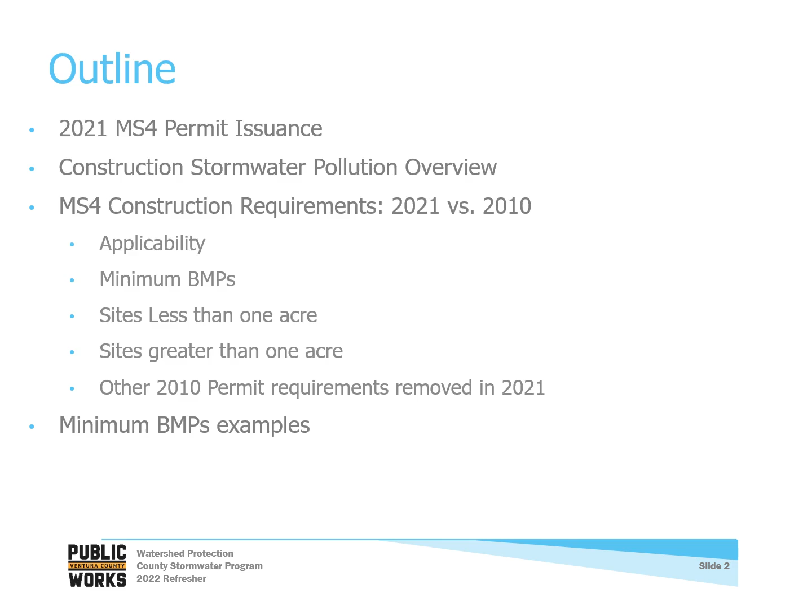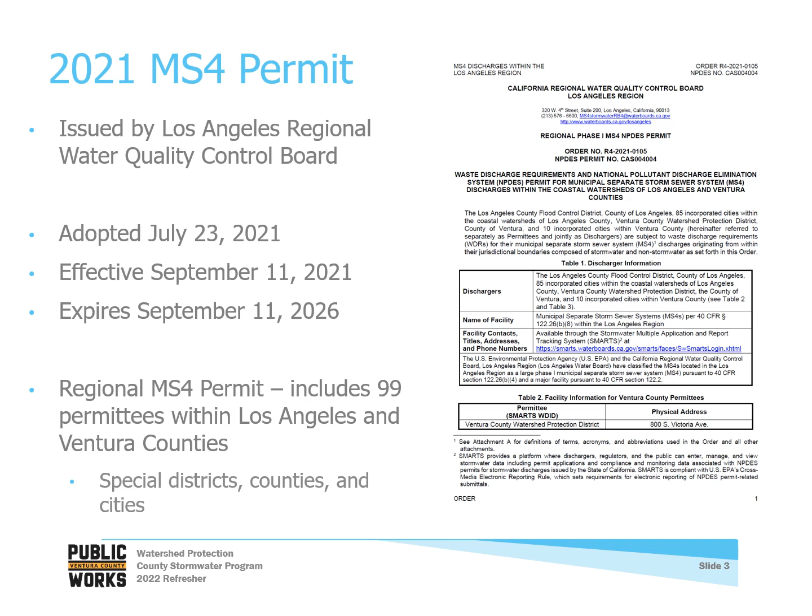In July 2021, the Los Angeles Regional Water Quality Control Board adopted a new regional MS4 permit that applies to all 99 permittees within the Los Angeles and Ventura counties. In the past, Ventura County has been issued a separate MS4 permit, so this is the first regional permit for Los Angeles and Ventura counties. The 2021 MS4 permit became effective on September 11th, 2021.

The 2021 MS4 permit provides two compliance pathway options. The traditional option to implement minimum control measures and comply with effluent limits is similar to the compliance strategy of past Ventura County MS4 permits. The Watershed Management Program option is a strategy that allows permittees to address water quality on a watershed scale.

All permittees from Ventura County, including the County of Ventura, have opted to pursue the Watershed Management Program option and have submitted notices of intent to the Regional Board that they intend to develop watershed management programs. Next, Ventura County permittees must develop watershed management programs and submit them to the Regional Board for approval by September 11th, 2023. This timeline is important because while watershed management programs are developed, permittees will continue to implement minimum control measures from the 2010 MS4 permit.

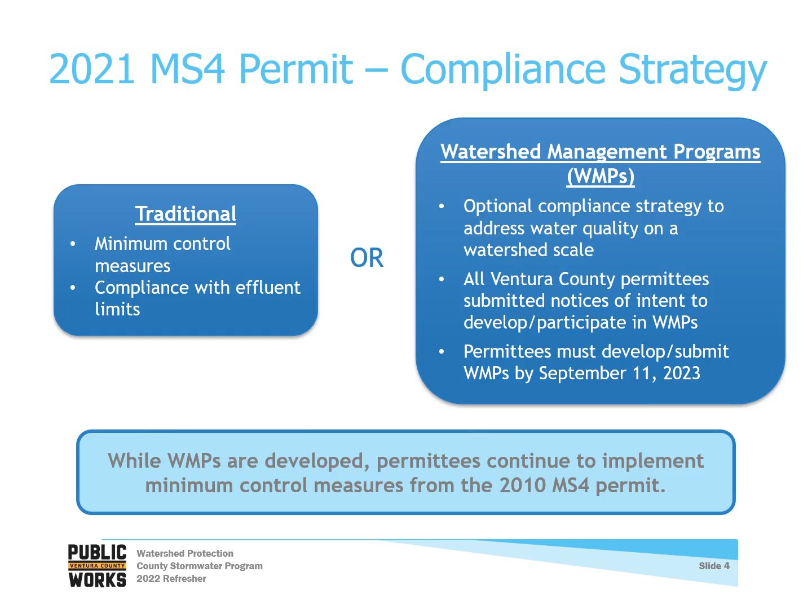Because Ventura County permittees need time to develop watershed management programs, the 2021 MS4 permit allows us to continue implementing the minimum control measures of our 2010 MS4 permit while the plans are developed. Minimum control measures include permit requirements for our programs like construction, planning and land development, illicit discharges, and others. This timeline means that the construction program changes that we will cover later in this training will not become effective until the watershed management programs have been approved by the LA Regional Board.

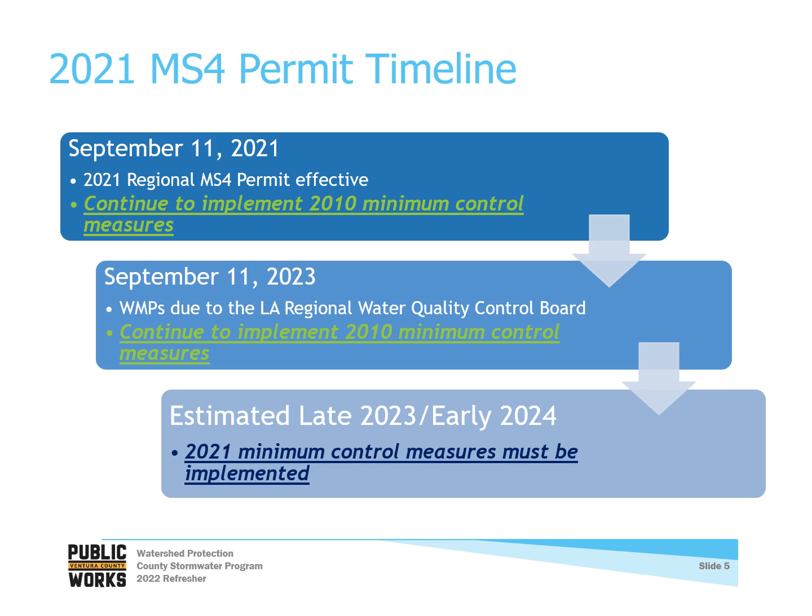Similarly, other minimum control measure changes like those for public agency and planning and land development requirements will not become effective until the watershed management programs have been approved. Regional Board approval is expected sometime in late 2023 or early 2024. That was a brief summary of the 2021 MS4 permit.

Before I go over the details of the construction program, I will provide a refresher on why construction is regulated for stormwater. Construction activities are considered high risk for stormwater pollution because there are pollutant sources that are unique to construction, particularly exposed soil. Unprotected, loosened soil can erode up to 100 times faster than natural surfaces that are compacted and or vegetated. Stormwater runoff can then convey sediment and other pollutants to surface waters.

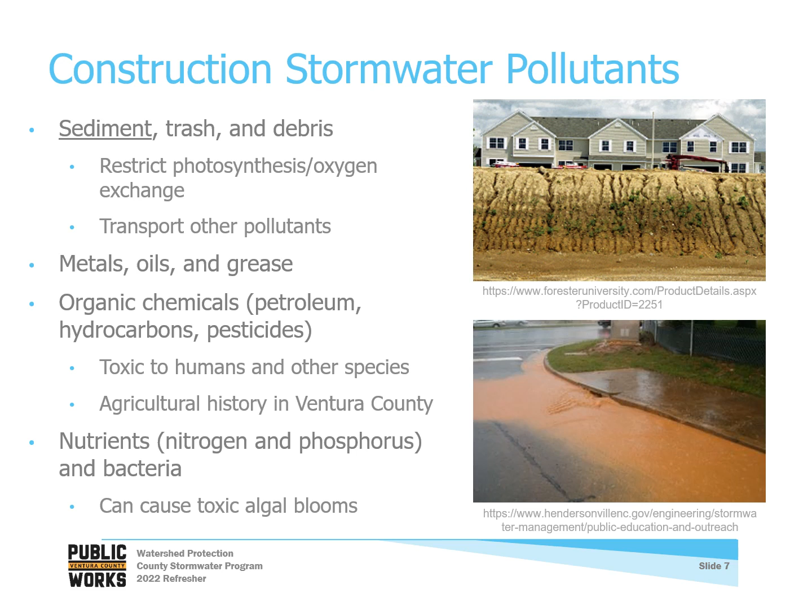To go over some of the impacts of construction pollution, the first that typically comes to mind is environmental pollution. For example, trash is a very common pollutant from construction sites, which, once in our surface waters, can be consumed by birds and fish and may lead to their death.

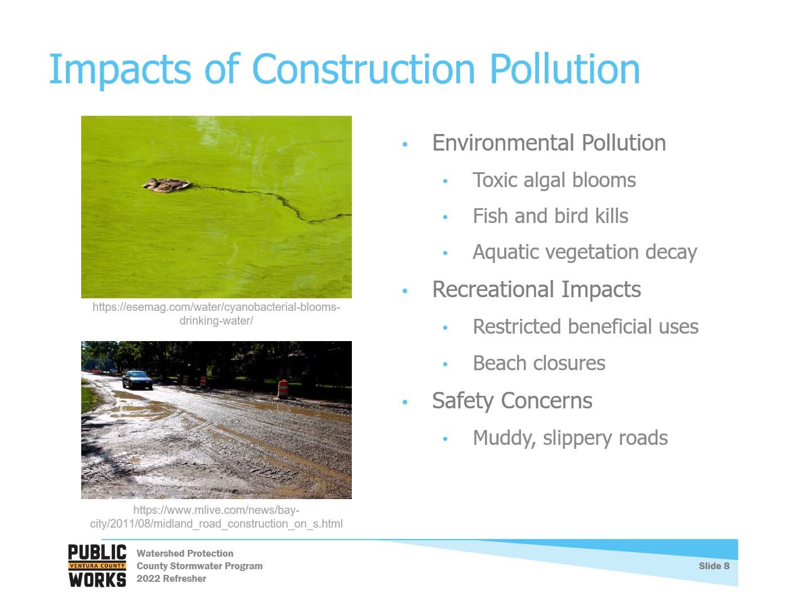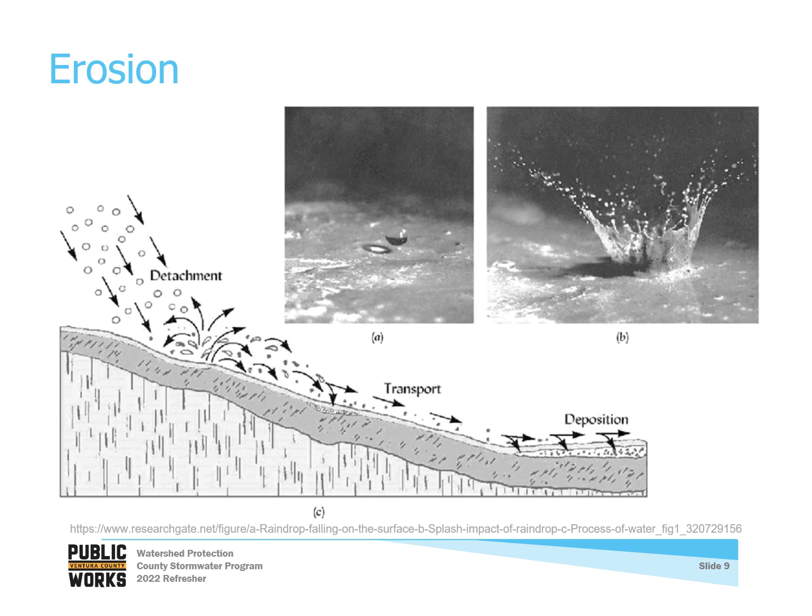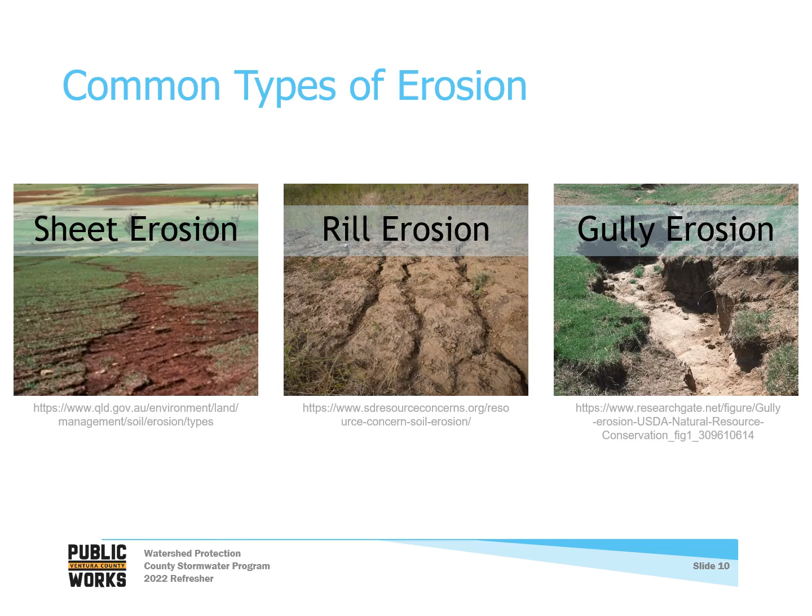Next, we'll take a look at a comparison of the new and existing MS4 permit requirements for construction. Note that the information on the next set of slides is color-coded to clarify which requirements are from the 2010 permit and which are from the 2021 permit. New 2021 permit requirements are in blue, and existing 2010 permit requirements are in green. As a reminder, the updated requirements of the 2021 MS4 permit discussed in this section are not expected to become effective until late 2023 or early 2024.

The first section in the construction program is on applicability. The language shown here is new to the permit and it clarifies applicability that wasn't clearly defined in the 2010 permit. This is added clarification and it does not replace language from the 2010 permit. Generally, any activity that disturbs land is subject to the construction program requirements.

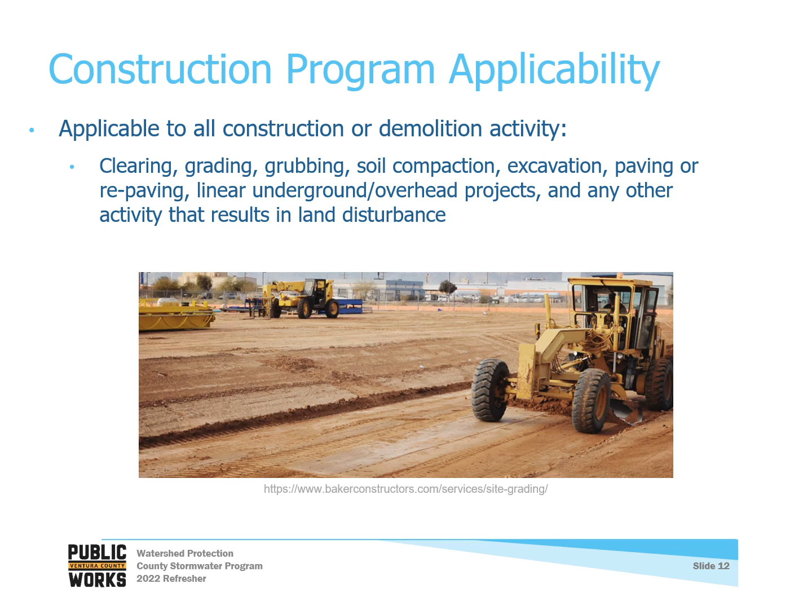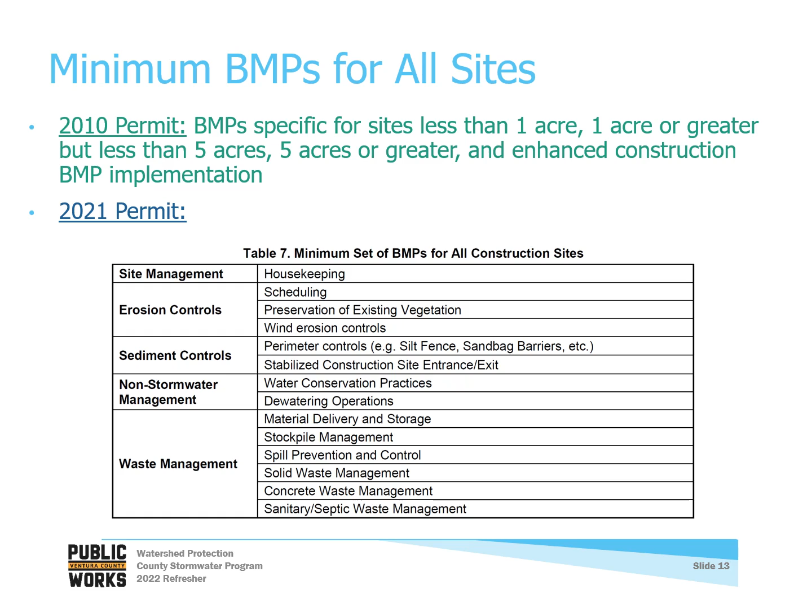The minimum BMPs, or best management practices, for all sites is a notable change from the 2010 permit. In the 2010 permit, we had multiple tables of minimum BMPs based on site size or risk level. In the 2021 permit, the minimum BMPs have been greatly simplified into one table applicable to all construction sites. Table 7 in the permit lists the minimum BMPs, which are similar to the 2010 permit's minimum BMPs for sites less than 1 acre. Note that these are minimum BMPs, and many sites will need additional BMPs to effectively control erosion and sediment. We will go over some examples of these minimum BMPs in the last portion of the training.

Table 8 from the 2021 permit includes the minimum BMPs for roadway paving projects. These BMPs are unchanged from the 2010 permit.

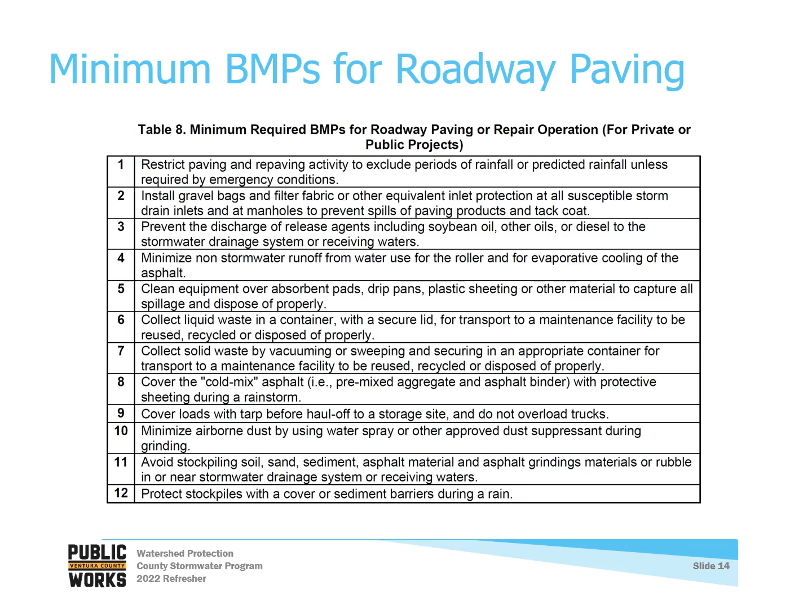For construction sites less than 1 acre, the 2021 permit requires an effective combination of the minimum BMPs. There was a change in the inspection frequency for sites less than 1 acre. The 2010 permit required all sites, regardless of size, to be inspected a minimum of once during the wet season. The 2021 permit requires inspections as needed, based on factors that threaten water quality. This could mean increased or decreased inspection frequency, depending on the project characteristics.

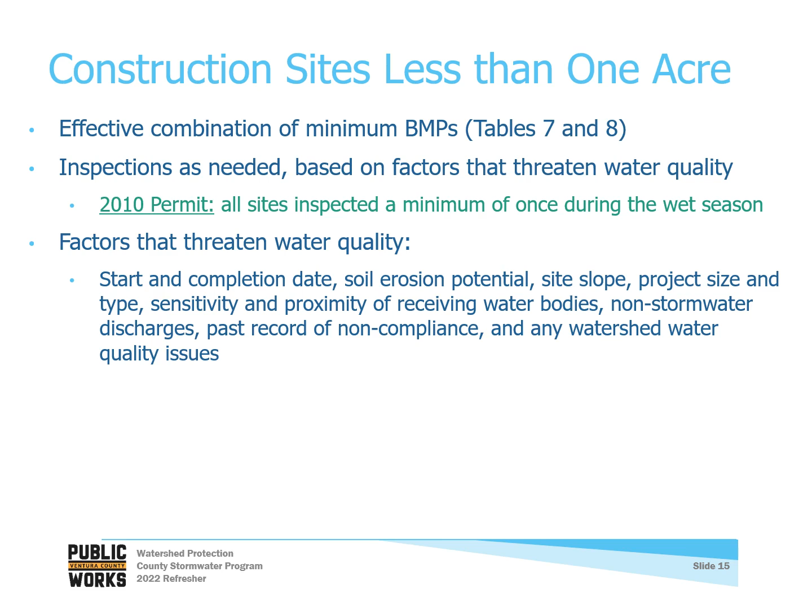Listed here are the factors that the permit identifies as threatening to water quality. Some examples include site slopes, proximity to receiving water bodies, and watershed water quality issues. These characteristics are fairly broad and could apply to many sites. This change gives the county flexibility to assess risk on a site-by-site basis, identify inspection frequency needs for all small projects, and document for permit compliance.

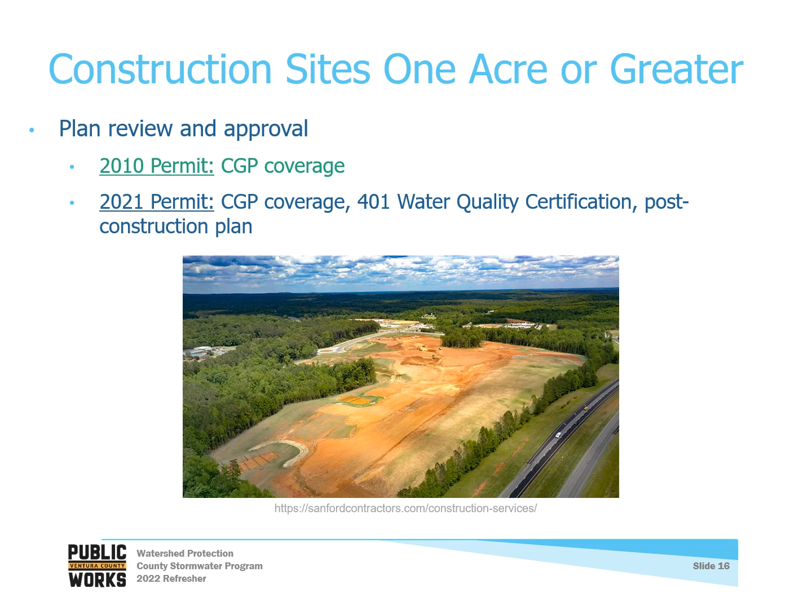There were multiple changes in the 2021 permit for sites 1 acre and greater. For plan review and approval, the 2021 permit increased the requirements to add 401 water quality certification and post-construction plans to the list of items that agencies need to verify prior to issuance of grading, building, or any other applicable permits. This means that the county may need to ask for additional documentation when reviewing projects for permit approval.

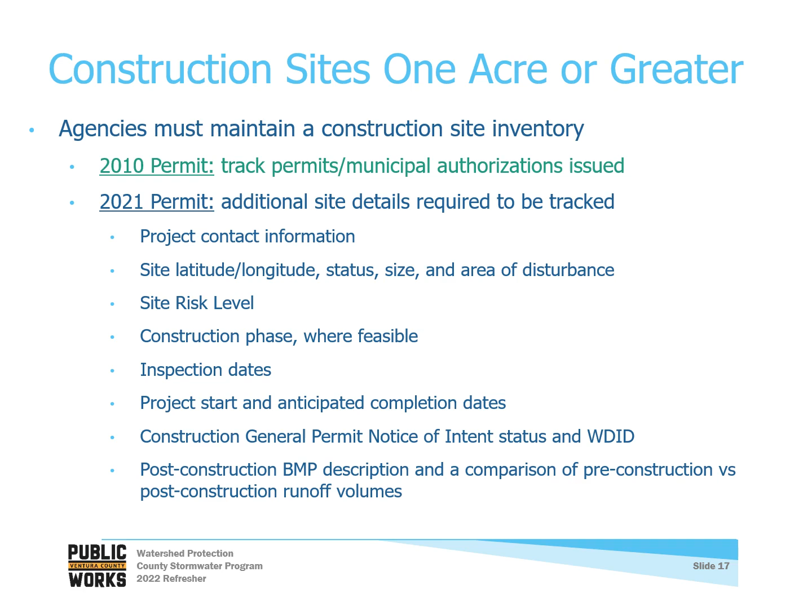For the construction site inventory requirement, the 2010 permit required that the county track permits and municipal authorizations issued. However, the 2021 permit expands the requirement to specify additional site details that need to be tracked. A few examples include site risk level, construction phase, and WDID.

The site inspection requirement for large sites 1 acre or greater is generally the most significant change in the 2021 permit's construction program. As mentioned before, the 2010 permit required all sites to be inspected a minimum of once during the wet season. The 2021 permit requires monthly inspections for all large sites and inspections every 2 weeks for large sites that are a significant threat to water quality.

The regional board did add language to this section suggesting that the inspection requirement could be met by the project's QSD, QSP, or CPESC on behalf of the county. However, that language includes the requirement for the county to verify and take responsibility for the inspection findings. As of now, we are unclear if this could reduce inspection effort for the county because the county would need to do an inspection in order to verify inspection findings. This may be a topic that is discussed further as the watershed management programs are developed.

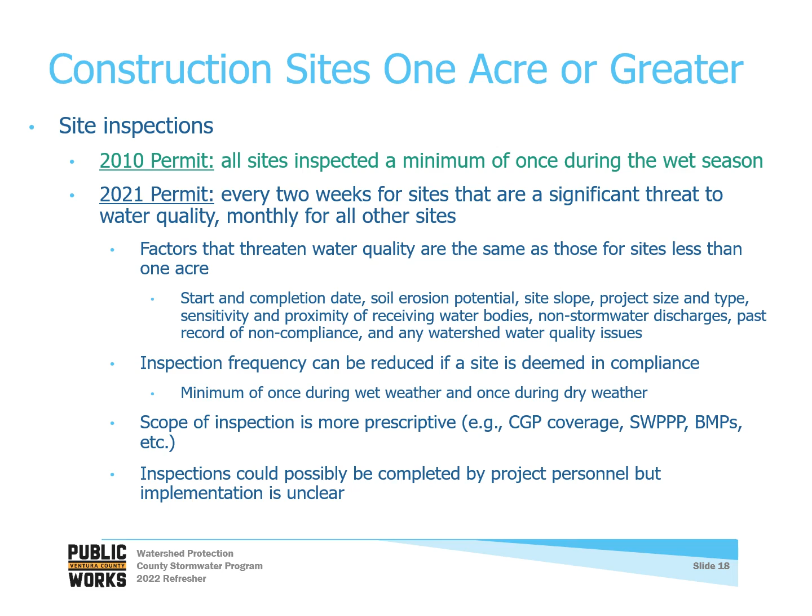Lastly, there are a few elements of the 2010 permit that were removed in the 2021 permit. As mentioned earlier, all of the tables with different minimum BMPs based on site size or risk were replaced with one table for all sites. The local SWPPP requirement from the 2010 permit was also removed. This included the requirements for rationale of the BMPs selected and the certification statements for the engineer and landowner.

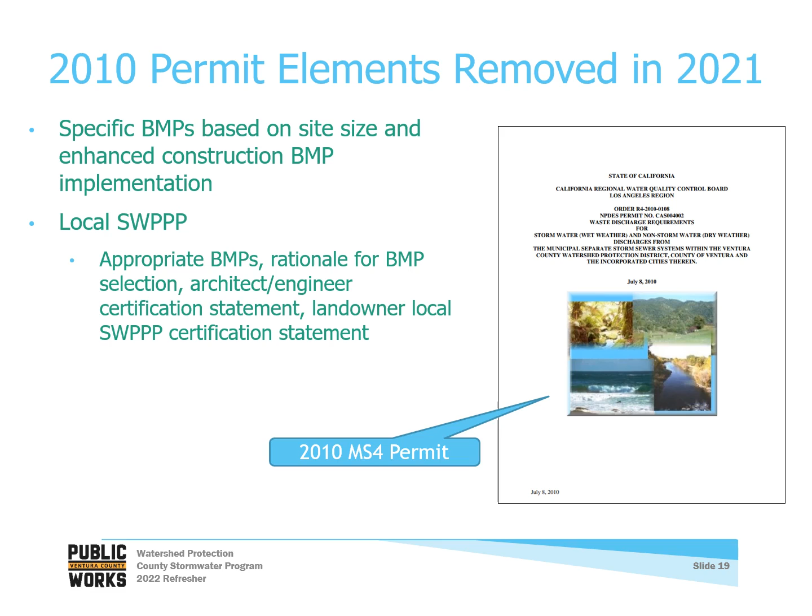To finish, we will review some examples of the 2021 permit's minimum construction BMPs. The 2021 MS4 permit splits minimum construction BMPs into 5 categories.

Site management BMPs are an overall approach to limit pollutant contact with stormwater. Erosion control BMPs aim to prevent or reduce erosion from happening, and should be the focus of stormwater designs because it is harder to control sediment once it has been eroded. However, sediment control BMPs are always necessary in case erosion controls fail, trapping soil particles after they've been eroded. Non-stormwater management BMPs aim to prevent discharge of materials other than stormwater, and waste management BMPs aim to prevent the discharge of trash and other waste.

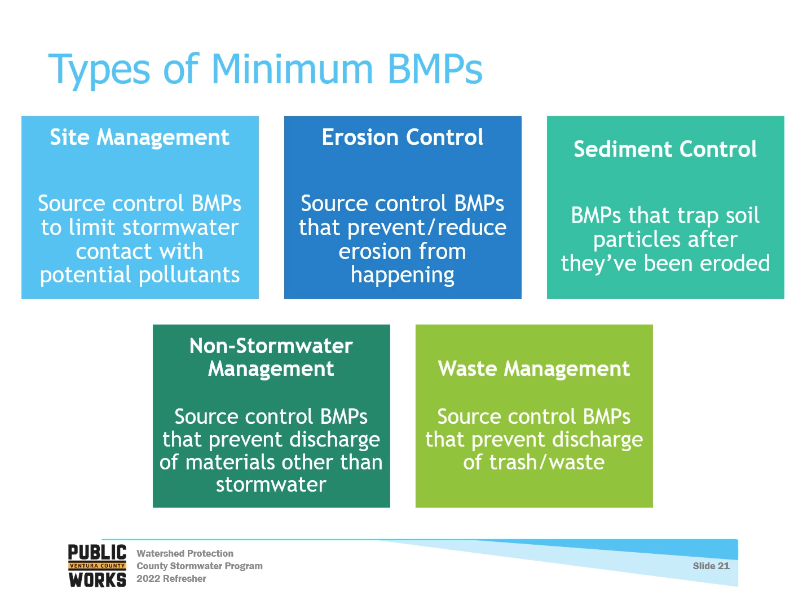Site management is a new BMP category in the 2021 permit, and it includes housekeeping. This category essentially combines efforts of all other types of source controls. The goal of housekeeping is to keep the site tidy and well managed, and it is closely related to non-stormwater and waste management BMPs.

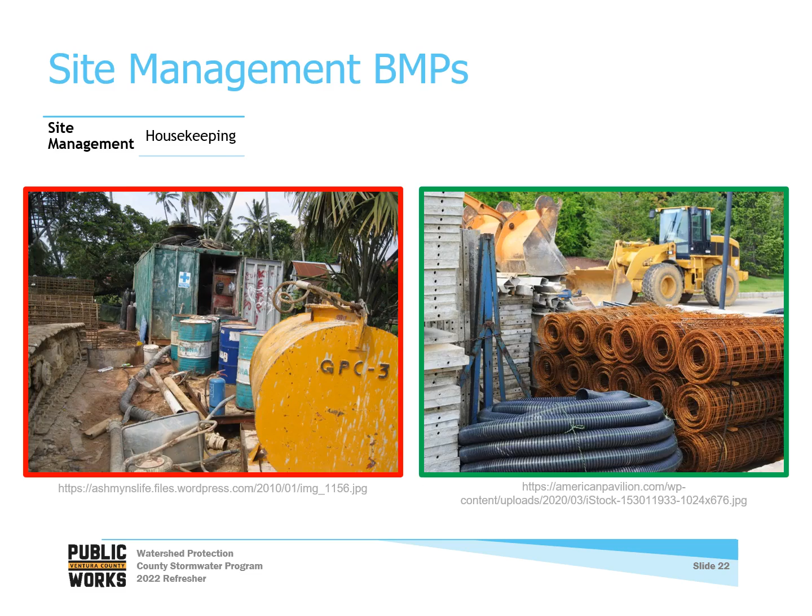Erosion control BMPs include scheduling, preservation of existing vegetation, and wind erosion controls. Scheduling is the implementation of a written plan to sequence construction activities and implementation of BMPs with consideration of local rainfall patterns. The goal of this is to minimize exposed soil when rainfall is likely to occur and to implement appropriate BMPs for each phase of construction.

Preservation of existing vegetation focuses on minimizing clearing so that established vegetation can continue to provide cover and root stabilization for site soils. Wind erosion control is a new BMP in the 2021 MS4 permit. An example of wind erosion control is using watering for dust control. Note that these are minimum BMPs and many sites will require more robust erosion controls.

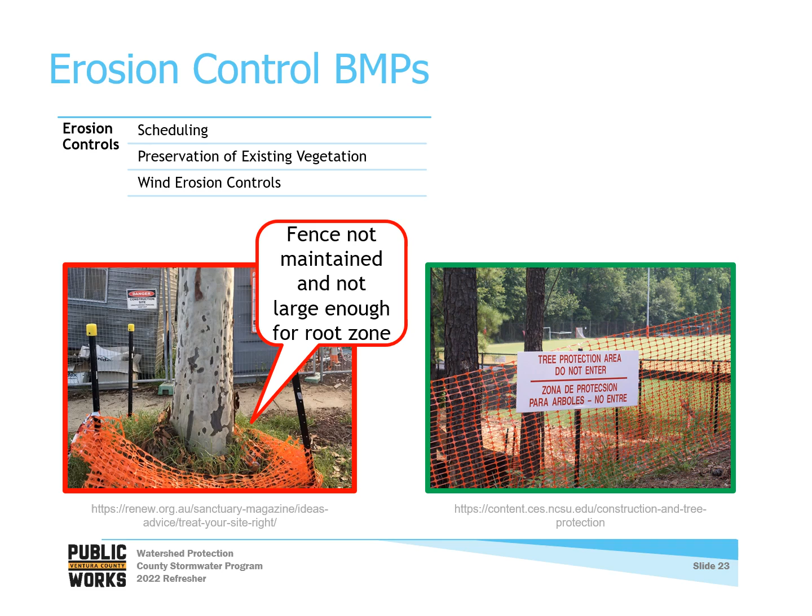Sediment control BMPs include perimeter controls and a stabilized construction site entrance. Perimeter controls like silt fence or sandbag barriers filter runoff as it discharges off-site. It is important that perimeter controls are properly installed and maintained. However, it is also important that BMPs are selected based on site conditions. Some perimeter controls aren't always appropriate for a given site. For example, sandbags are too labor-intensive to maintain along perimeter, or silt fence can't be installed on hard surfaces.

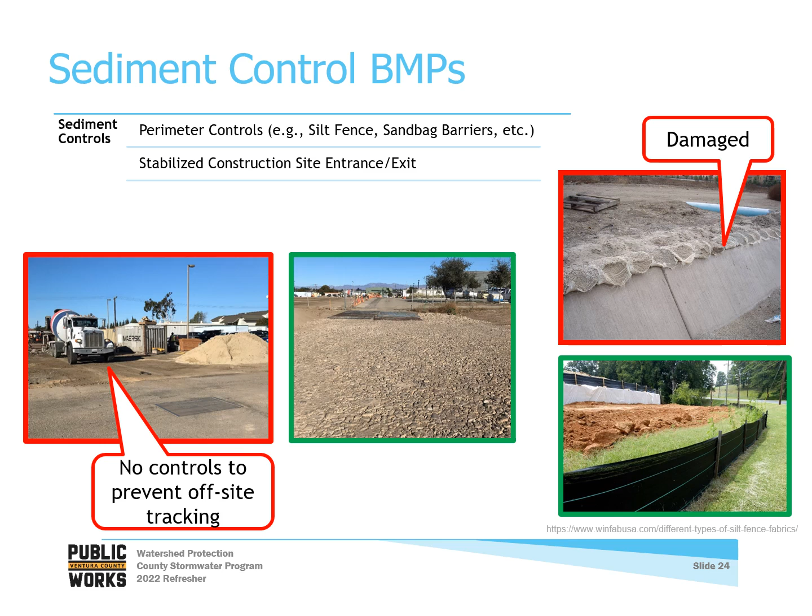A stabilized construction site entrance is a defined point of access for the construction site that has been stabilized to reduce tracking of sediment onto off-site roads. All entry to and exit from the construction site should be limited to the stabilized construction entrance for all vehicles, including passenger vehicles. Other unstabilized entries should be blocked to prevent use. Rock for the stabilized construction entrance will need to be replaced or turned when sediment has clogged the void space. Trackout is one of the easiest ways for a site to have an off-site discharge, and it is considered a violation of stormwater requirements. Therefore, it is important that the stabilized entrance is frequently maintained.

Non-stormwater management BMPs include water conservation practices and dewatering operations. Water conservation practices avoid using water on site in ways that could cause erosion or off-site discharge of pollutants. Dewatering BMPs aim to manage dewatering operations to prevent erosion and off-site discharge of pollutants.

The photo shown here in red is an example of a site where BMPs were implemented, however the BMPs were not appropriate for the site conditions. This discharge would still be considered a violation because the BMPs implemented are not sufficient to remove sediment. This is a reminder that BMP implementation is not a checkbox and that it must be adaptive, site-specific, and appropriate for current conditions.

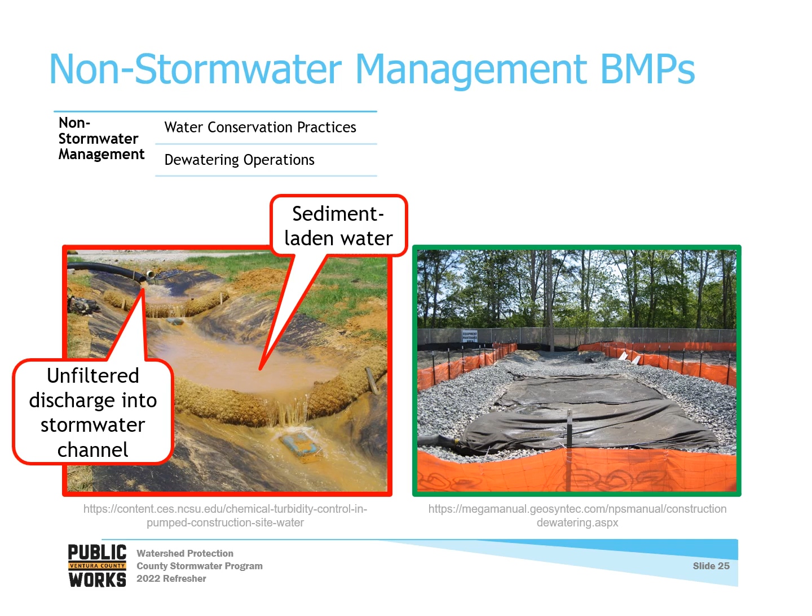Waste management BMPs include material delivery and storage, stockpile management, spill prevention and control, solid waste management, concrete waste management, and sanitary septic waste management.

For spill prevention and control, a spill kit should be available on site. For solid waste management, containers on site should be covered and should not be leaking. Concrete slurry is not an allowable discharge. So concrete washouts should be inspected for leaks and washout activities should be supervised to ensure that the washout is actually used. Any spilled slurry needs to be cleaned off of soils immediately.

For sanitary waste management, facilities like portable toilets should be located away from stormwater conveyances. They should be tied down, provided secondary containment, and be regularly maintained.